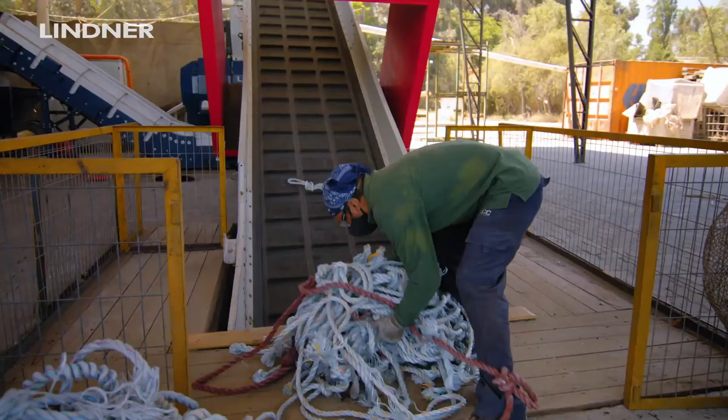That was the aim of the project. It was very difficult and complex. There were logistical and technical challenges. We are processing material from fish farming and fishing companies from the Patagonia region of the south of Chile. They are very tough materials to process since they are, of course, built by very clever people never to break. And the first thing we have to do is to break them apart to reduce the size. And we needed to do this in an economical and high volume way.

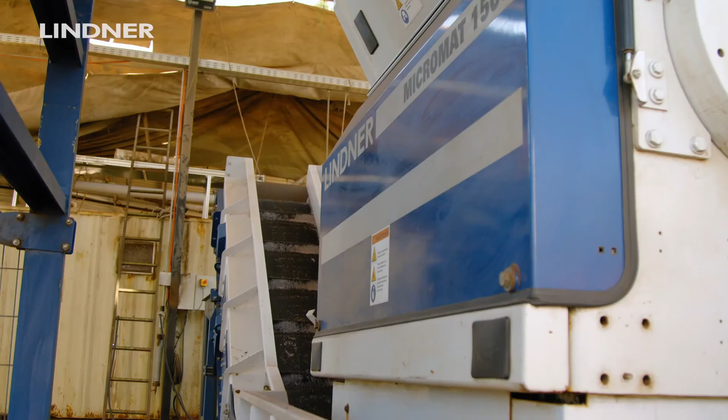And that's why we decided to go on with Lindner on the Micromat 1500. As I said, the first stage of our recycling process is the shredding. And we needed to do this for very strong contaminated materials. So we needed a very tough and reliable machine. Lindner was the best alternative we could find, and we decided to go on with the acquisition of our Micromat.

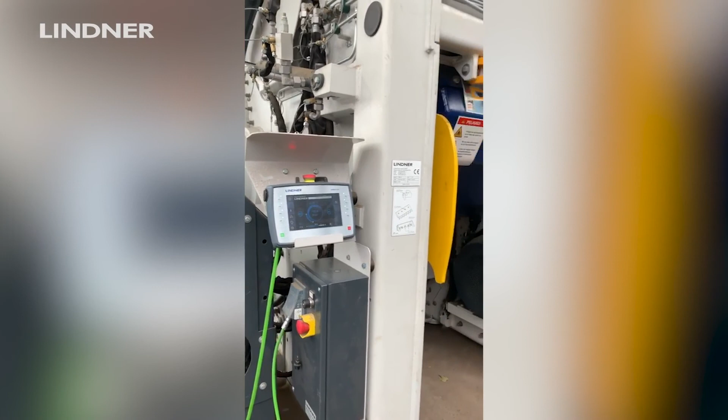We received our machine in January 2020. Just a few days later, the pandemic hit our country. Our borders were closed and there was no possible way for the Lindner team to travel and visit us to commission the machine. So they were flexible enough to find new ways to set up the machine remotely, and we have been very happy that everything worked like clockwork, and our machine has been running smoothly for the past six months now.

We are achieving outputs of over 1,000 kilos an hour of shredded nets and shredded ropes transformed, in this case, in filaments. Our product is recycled pelletized material which we use ourselves for the injection molding of pallets, crates, and other high-volume industrial products.

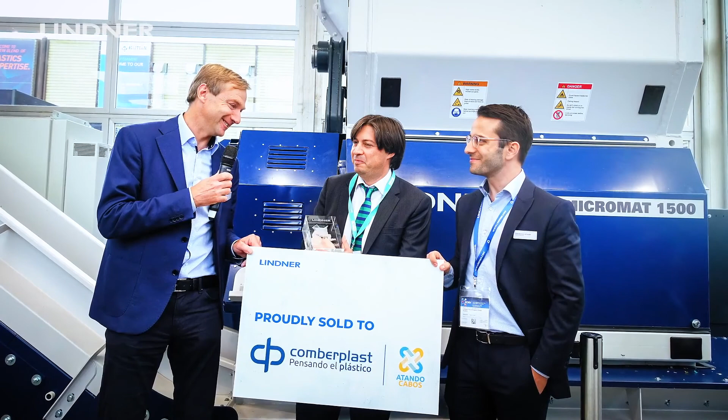I'd say that one of the things that really is important for us is collaboration. And I think that's the only way to solve these new and hard problems that we face as a society. So the collaboration we have received from Lindner since the beginning of the project until now, and on a daily basis, with all the challenges we are facing with new, tough to recycle material, that's one of the things that I most appreciate about the relationship we have built with Lindner, and that's why we are very confident on continuing working with Lindner in the future.

I am Peter Dodler, Managing Director and owner of Dali Plastics and Kuroda BV. Both companies work in plastic recycling. Dali Plastics is mostly involved in the collection, logistics, and processing of waste film. That is, pre-sorting and getting it ready for the plastics recovery industry. We collect about 60,000 metric tons of waste film per year, including agricultural film.

So, first, the agricultural film is collected with a mobile crane or with open skids that we install on farms. Then the material is transported to Dali Plastics in Zutphen. There, the material is weighed and unloaded. At that time, it is already visually pre-sorted using a crane with sorting claw.

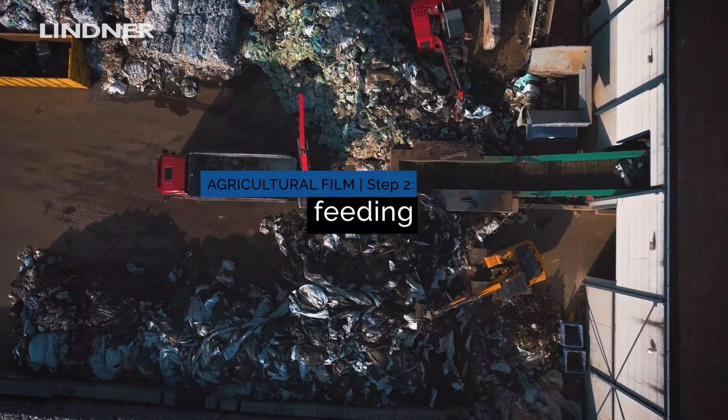We chose Lindner shredders for agricultural films because, with them, non-shreddables are no big deal. Iron parts are easily sorted out, and we have no huge losses. With the safety clutch located inside the Lindner shredder, we have the advantage that it simply stops when there are non-shreddables inside. We open the maintenance door, and it's very easy, since the material that's still present in the shredding chamber is pushed forward. You just roll back the cutting system slightly and take out the foreign object. Close the maintenance door, and you can continue as usual.

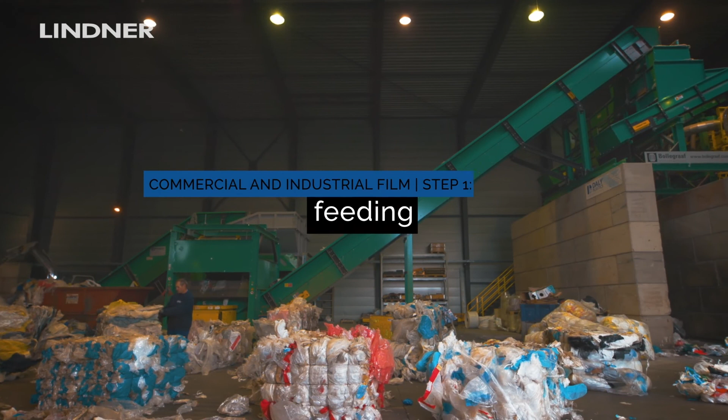The facility is designed with a conveyor belt feeder. The material is pre-sorted with an electric mini digger and put on the conveyor belt, which is controlled automatically by the Jupiter 2200. It then shreds the material to an A4 size. It's important that the material is a certain size. We can't have too many fines, because they would be sorted out further down the line. The material from the Jupiter shredder then passes over a conveyor belt under the overbelt magnets. It is then transported up to the sorting systems, which are located approximately 8.5 meters overhead.

The ballistic separator separates the 2D from the 3D material. Material that rolls or jumps moves to the back, and the material that lays flat on the conveyor belt is moved to the front and then passes under the NIR sorters. The material that now behaves as 2D material is evenly distributed over the conveyor belts and passes under the NIR sensors at 3 meters per second. The NIR sensors then scan the material at 2 lanes at a time. Everything that is not LDPE or LLDPE is shot out and is later transported by a conveyor belt to a storage area. The other material that was conveyed by the sorting system is then transported to the designated storage area.

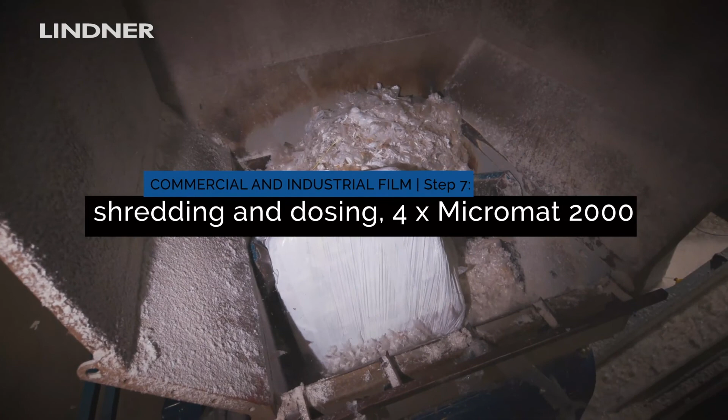The bales are then taken out of the storage area and transported to the Micromat. We have 4 Micromat shredders in the facility. They easily shred 1.5 to 2 metric tons per hour. The material expelled by the shredder has a particle size of 50 millimeters and is transported by a tube to a buffer silo, and then to an extruder where we plasticate and homogenize the material and take it to a laser filter. At the extruder's front end, the material is filtered again, this time to 90 microns using a belt filter, so that we can guarantee that the material is clean and can be turned back into film.

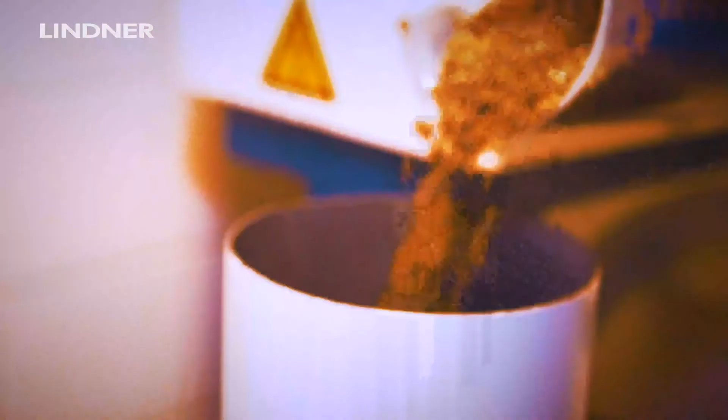This is our specialty, that we can say, thanks to the homogeneity, the stability, and a lot of mixed-in stretch film, which gives the material a certain elasticity, that we have very strong film with the same performance as virgin material. The only difference is the way it looks.